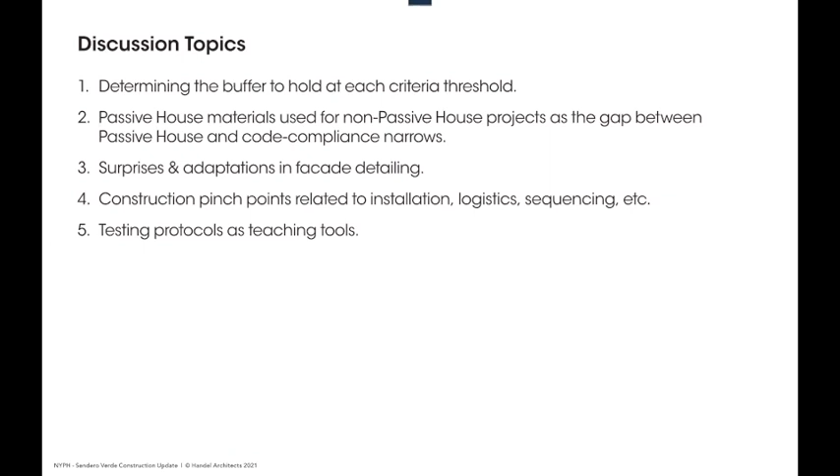We touch on a bunch of these things throughout the presentation today, and then we'll hopefully have a discussion afterwards. Let's go to the next one.

So we presented this project a lot in the past few years, but let's just do a quick refresher. Sendero Verde is located in East Harlem. It's a 100% affordable housing, multi-building project with Jonathan Rose Companies, L&M Development, the Acacia Network, and New York City's Housing Preservation Development Department. We have a great design team. In addition to Handel Architects, we have Steven Winter as our passive house and sustainability consultant. This is an Enterprise Green Communities project. Cosentini is our MEP engineers, DeSimone for structural, and then Vidaris for exterior wall.

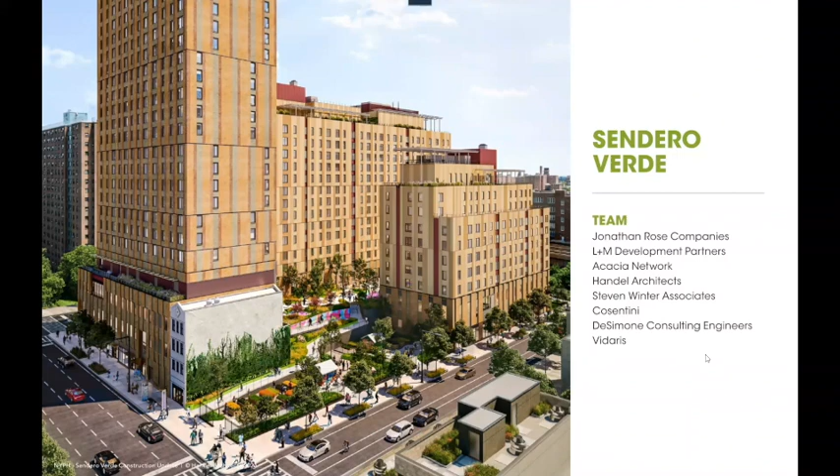The construction manager on the job is also a fantastic team from L&M Builders Group. So Sendero Verde is organized with the tower as building A and the low rise as buildings B North and B South. Now building A is going through bank closing and is scheduled to start construction this fall. Building B is the project that's under construction, and that's going to be our focus today.

Taking just a big picture look at this, Sendero is a 100% affordable housing project. One of the client partners, Jonathan Rose, believes that affordable housing is a connector for the community, and we believe that too. He describes his approach here—you can see the little diagram at the bottom—as a community of opportunity.

And it's about weaving together local culture, arts, healthcare, recreation space, environmental responsibility, and all these other planks, all these other goals. Sustainability is like one weave in this larger picture. And all these components connect neighborhoods together, and they can become a catalyst for social and urban change.

Looking at the diagram there, you can see that the upper floors of Sendero are housing, while the podium has this robust community facility program. In B North, that project has a K-5 charter school by Harlem Children's Zone.

In B South, there's Union Settlement. I don't know how much you guys know about settlement houses - these are uniquely New York institutions, and Union Settlement is one of the largest and oldest New York City settlement houses, and it's been based in East Harlem for over 125 years.

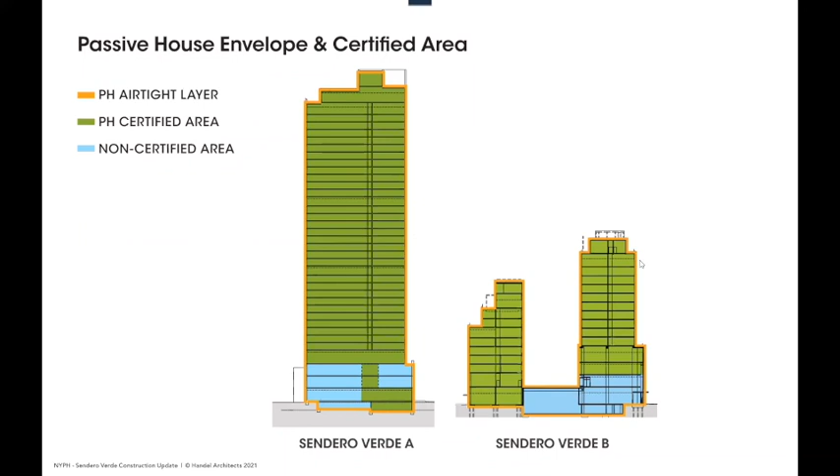Yeah, thanks, Ryan. So, one of the things we're going to get into some technical stuff here. And one of the things I want to mention is that the passive house concept applies really, really well to larger scale, especially multifamily buildings.

Now, think of it as you compare a house to an apartment. A house has essentially 6 sides of building enclosure area surrounding the usable square footage. When you have a multifamily building, if you look at a typical apartment that's not necessarily a corner at the top of the building, it really only has one side of exterior surface area.

So what happens is you get this benefit with large scale buildings where you have a lot of interior air volume and a lot of usable square footage, but relatively speaking, not as much square footage of surface area that you will lose heat to.

So as a result of this, you actually end up needing less insulation levels to meet the passive house criteria. So we wanted to compare, because we're going to show results from B South and B North, and get into the exterior wall assemblies of each and show you the difference between B South and B North.

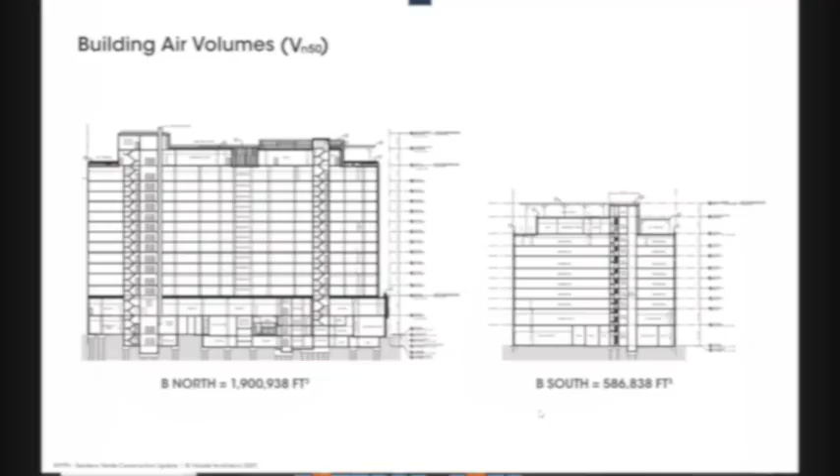One great update we can share is that both buildings are pre-certified, B South and B North, through the Passive House Institute. We're very excited about that, it's a very good milestone. It's something I feel is critical on every project, to ensure you have a grounding going into construction that you cannot deviate from this level of performance because you've been pre-certified. It really gives you something to stand on when working with contractors and the team throughout construction.

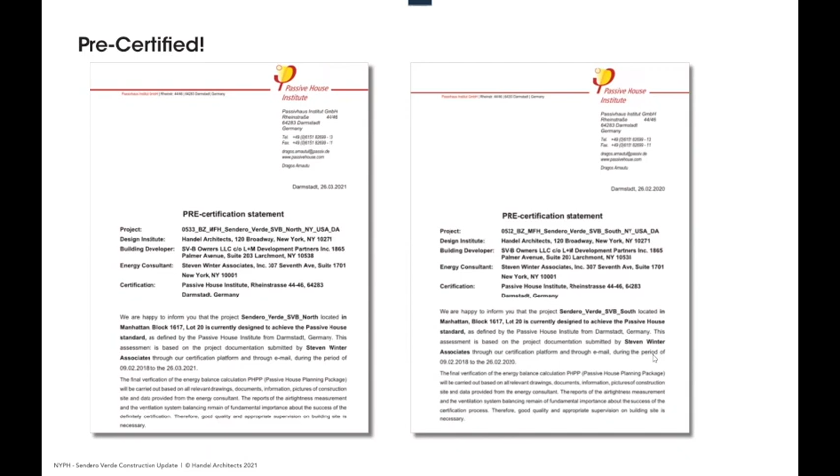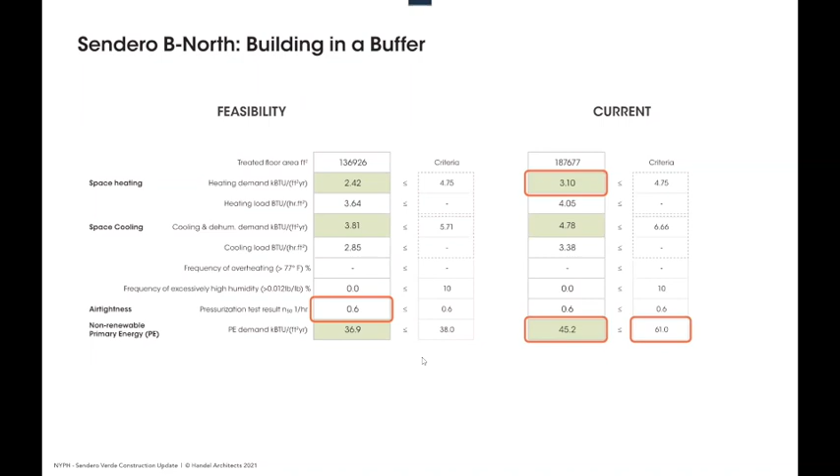As Lewis will get into in a few minutes, we'll be able to see the difference in levels of insulation required for this project. Again, this is all related to the building's air volume. The same thing holds true across the board from the cooling demand perspective with regards to occupancy, our air tightness assumption being as conservative as possible there, and on the primary energy thresholds as well.

All right, thanks Dylan. So I'm going to talk a little bit about the facades of the building here on B North, and also touch on Building A as well, just for reference.

On the left side here, we have the design detail for the typical wall in Building A. Building A is a brick facade all the way up the tower. We designed this one first, so that was kind of driving the initial part of the project. It's a stud backup wall with mineral wool insulation. We have continuous mineral wool insulation in the brick cavity. Then we have our airtight layer, which is our waterproofing behind the brick, and a vapor control layer to keep moisture out of the insulation on the warm side of the air barrier. So that's Building A, where we had a brick facade.

On Building B, where we primarily have an EIFS facade, there's a lot less insulation. Over here we were looking at 9 inches of insulation, 6 inch in the cavity, 3 inch continuous. Here we're looking at 4 to 6 inches of insulation. The 4 inches is on B North and the 6 inches is on B South. There's some minor areas where that deviates, but that's generally the case. That's indicative of the heating demand Dylan was getting into, where we had a lot more comfort on B North than on B South, just because of the volume of the building.

EIFS is a challenging material to work with aesthetically, but it's a great material from a thermal standpoint. There's no thermal bridging. You can install it after the windows, so you can overlap the window frame and get really good install values on your windows. We end up getting an R24 effective here with this wall typically. We have UPVC windows in here.

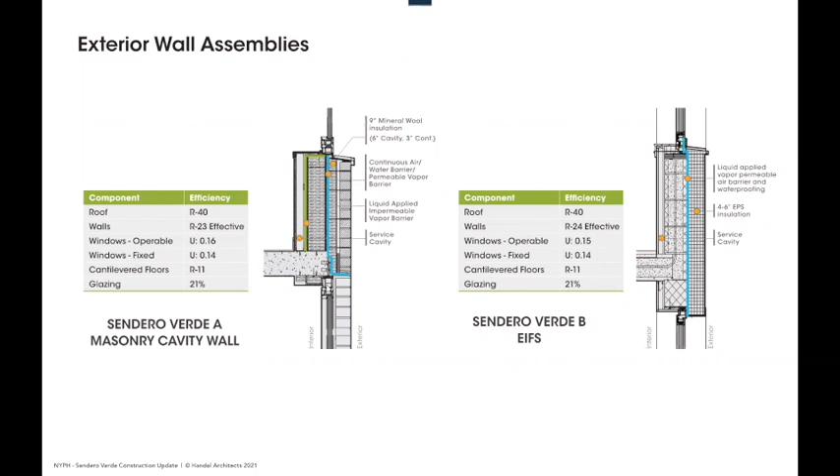We do have some brick facade on Building B North, and that area is a similar detail to what we're seeing here. But for the most part, we're dealing with EIFS in the passive house certified boundary.

This is a good construction photo showing the layers of the EIFS as it's being constructed. You see the DensGlass, and the blue is the air barrier and waterproofing. The white is the EPS insulation. The gray is the mesh and base coat. And then you have your finish coats going on. This is not quite the finish - there's one more coat that'll give it a little bit more vibrancy.

So you can really see that there's no thermal bridging going on here. It's just continuous insulation all the way up. We do have some deflection joints at the slabs and some drainage joints. The deflection joints are just in the finish. The drainage joints do go all the way through. So every 3 floors or so, we have a linear thermal bridge, but otherwise it's a pretty continuous facade.

The insulation was something we really focused on with the project. We wanted to minimize the embodied carbon, which is why we didn't go with XPS - you can see how big an impact XPS has, even though it is a higher R value. We opted for a lower R value in the exterior wall insulation just to get that carbon down. We thought it was a worthwhile trade-off. We end up with maybe an inch more insulation, but a significant improvement in the overall carbon.

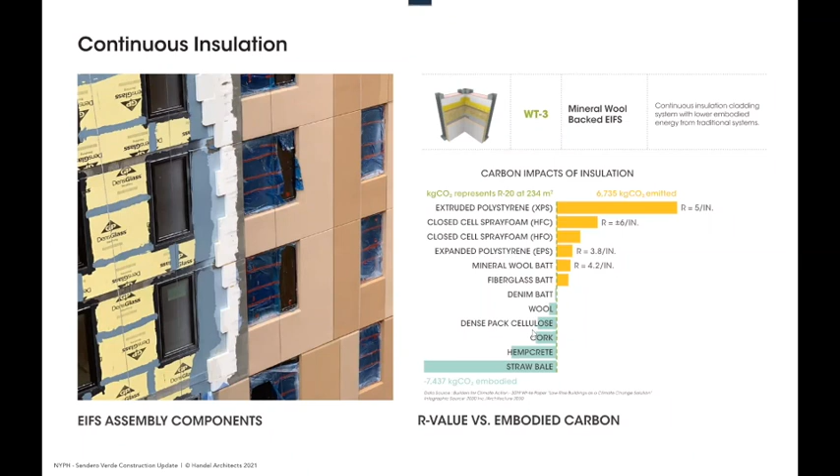We wanted to go with mineral wool, but at the time there was not a mineral wool system on the market. Thankfully there is now, so on our next project we'll be looking to employ that the next time we're using EIFS.

There are some thermal bridges with EIFS at the bottom of the wall. Basically anywhere where it needs to drain, there's a thermal bridge. So at the bottom of the wall, we had a situation where we needed to get flashing up behind the drainage plane. Typically, you would turn that flashing up the wall, and that would be a pretty significant thermal bridge.

What we did was cut the flashing short. So you have the stainless steel, it comes, it stops before it gets to the wall, and then we're lapping over that flashing with a membrane flashing that's coming down off of the air barrier. That limits the thermal impact of that detail.

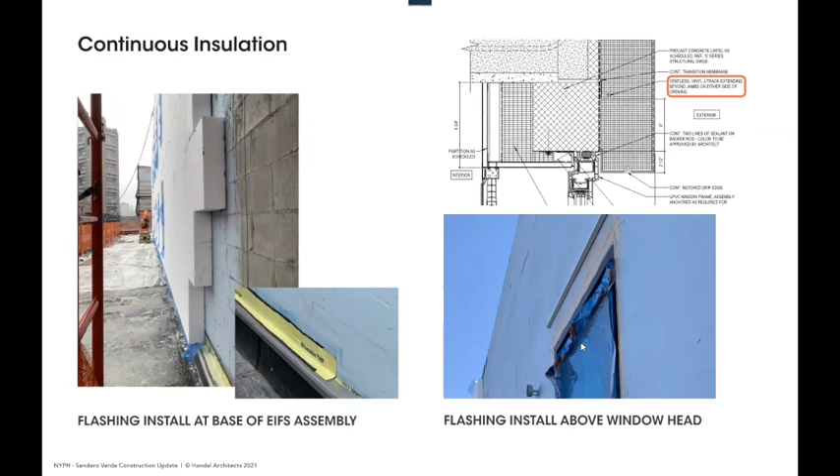Similarly, at the window heads, we wanted to have a piece of flashing here. We revised this detail to get rid of that flashing by having this J-track embedded above the window within the EIFS system. You can't tell in this image, but this track is actually sloped, so any water that comes down the wall hits that track and runs off the side of the window. That allows us to have no flashing above the window head, which is nice aesthetically and also from a thermal standpoint.

Other thermal bridges we're dealing with - we have some significant structural thermal bridges at things like canopies. We have a big steel canopy at all of our entrances, and we have a structural thermal break there, a steel to steel thermal break. We had to spend a lot of time coordinating this, getting it sized and oriented correctly to get through our storefront there.

We have structural thermal breaks below curbs for larger equipment. This is for our generator.

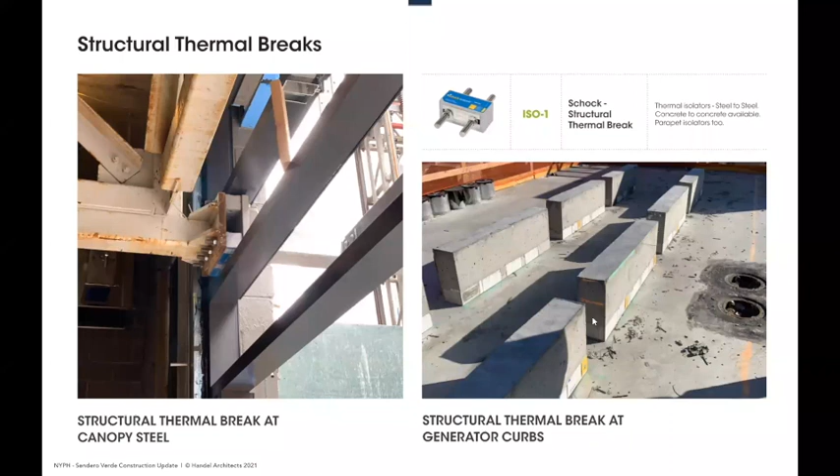At places with a little less engineering required, we're using the general plastics - like dunnage, this is our PV dunnage, our post for our PV system, ladders, OSHA rails. We're using the general plastic stuff. It's a lot easier to work with on site.

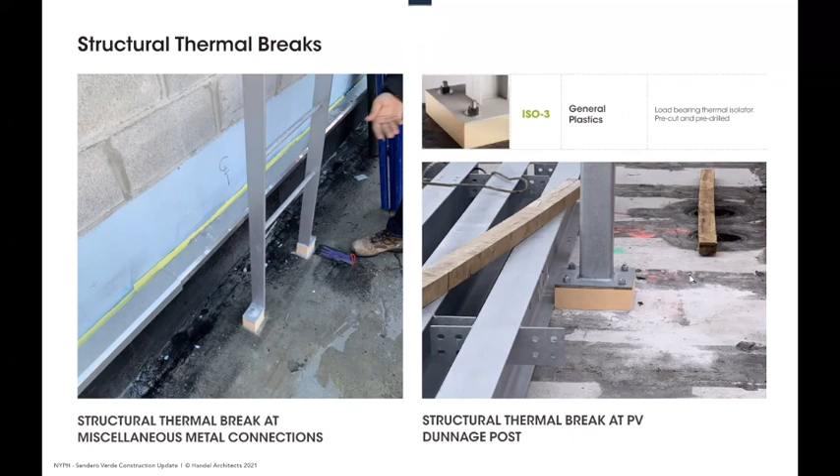Then there's AAC block. We're using this significantly throughout the project, and really this is a product that we're using on non-passive house projects now as well. It's a very versatile product.

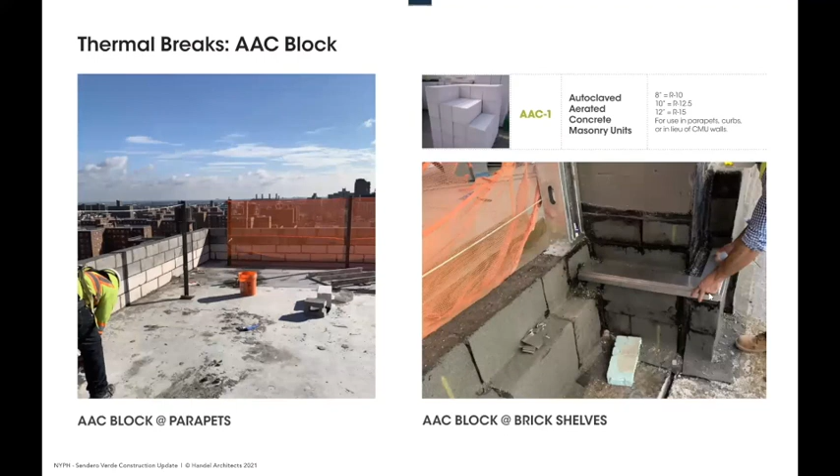This is it at the parapets here - 2 courses of AAC. That's the lighter colored block, and then the CMU above. This is already wrapped in waterproofing, but down here is AAC sitting beneath the brick. So in the locations down at the ground floor and the second floor, where we have brick coming down to our courtyard or our grade, we can set that up on an AAC shelf.

That parapet detail is really one that we're looking to use everywhere, both passive house and non-passive house, just because it really simplifies what is a generally complicated detail. You can see the therm model here with 2 courses of AAC - it really just eliminates any thermal bridging from the parapet into the space.

And this is without wrapping this thing. Typically, we'd be wrapping the parapet in insulation, trying to tie it into the roof insulation. That makes the waterproofing more difficult - it's a kind of expensive detail, a lot of opportunity for error. So this allows us to do this very simply.

The AAC is the same module as CMU, so you're able to get a CMU block above, which we like because we like to mount the railings into the CMU, not into the AAC. It's got a little bit higher structural capacity, so this allows us to get our parapet mounted railings mounted directly to the CMU. Then you have a completely thermally broken railing system, and all very cost effective through that AAC system.

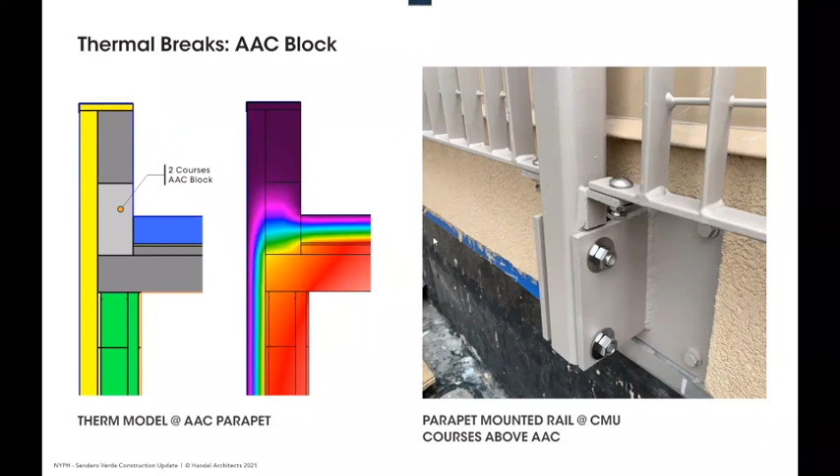Another point of significant thermal bridging was the shelf angles. There is limited brick scope in the passive house envelope, but there is some. This detail was largely developed for building A, but we pulled it onto building B where applicable. We knew that this detail was going to be tricky with our window heads, but we wanted to design a detail that was cost effective and something that the masons could really get in there and do from day one, not reinventing the wheel. So we looked at a series of different systems, but the thing that seemed to work the best was using a thermal shim from Armatherm.

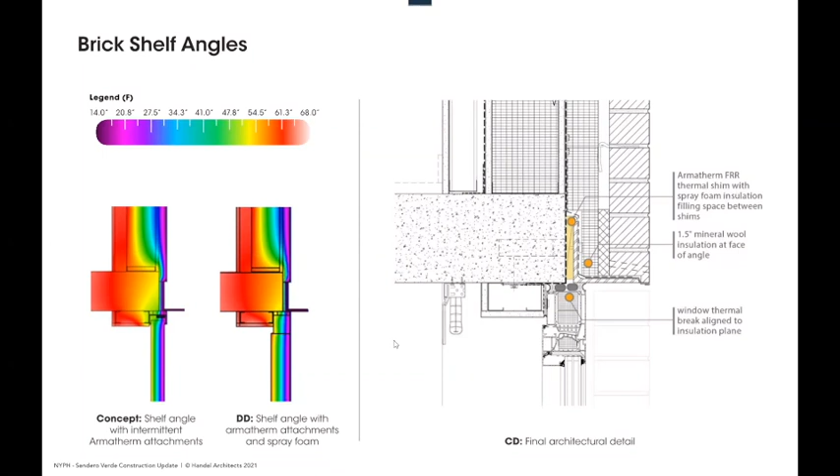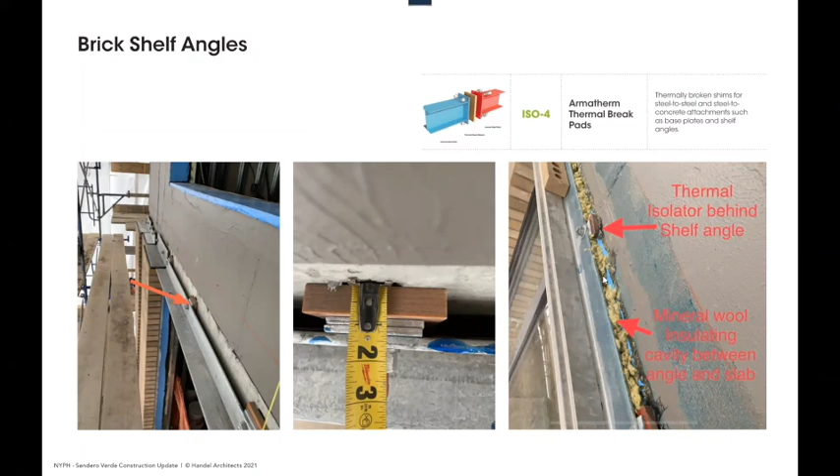Another unique detail we were dealing with here is at the brick. These are all brick details because the EIFS details are really straightforward. With the windows, the EIFS are installed in the wall, the window is aligned to the backup wall, and then the EIFS comes right across the edge of the frame, giving us a good thermal condition. That's possible because the EIFS can be installed after the windows are installed.

With the brick, we wanted to be able to install it first. So we developed this detail to minimize the thermal bridging at the jambs while also allowing the brick to be installed first. The brick is installed against this blocking, so we have a single piece of blocking that acts as a cavity closure. It allows the insulation to get as close to the window frame as possible, and we have a little additional spray foam in there to fill that gap.

The brick is sealed to the window, and the window can be brought into place from the inside and sealed there. This is a photo of the blocking wrapped in the air barrier before the window's installed, and this is from the outside after the window's installed.

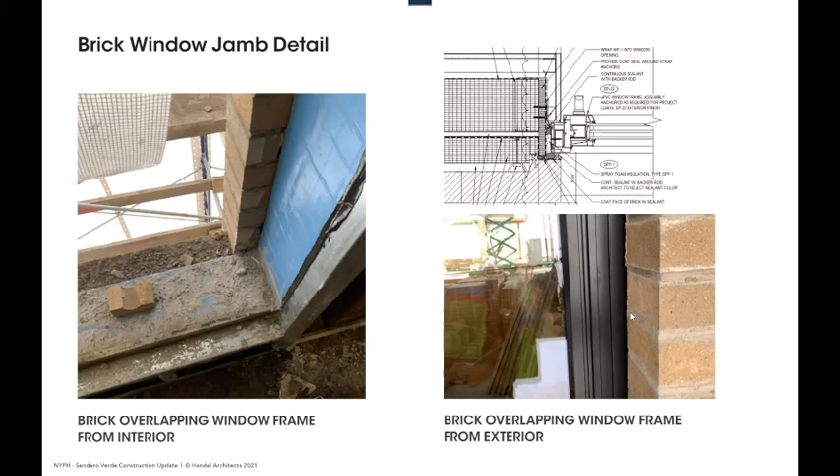One of the things we wanted to highlight here is that this project is so unique in that there are passive house elements and passive house areas of the facade, and then there are sort of non-passive house areas as well. We feel this is a really good potential case study for looking at how we can impact normal construction practices on every project, not just passive house projects.

One thing I'll mention is I'm not speaking in terms of theory here. We actually tested this window, and we determined that on our first pass, they were a bit over our threshold for air tightness. They came up with additional measures to get to a passing threshold from an air tightness perspective, roughly around 0.1 CFM per square foot of facade or window area.

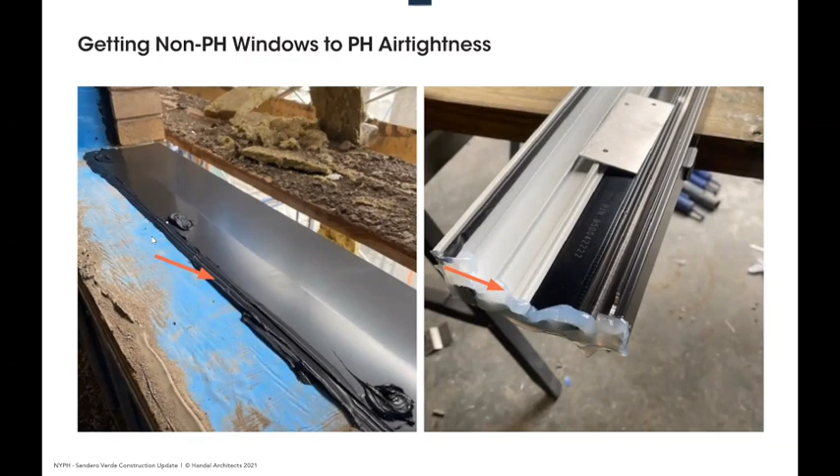You can see setting that sill flashing in sealant, that sill pan in sealant, provides an additional level of air sealing that we found to be critical on this specific system. We've also determined some corner seams as well, and worked with the contractor to see if that would help. I think that provided some benefit, but the interior measures didn't work as much as some of the exterior measures, like the caulking of the receptor and the flashing.

With passive house windows, we generally see that the weep holes are typically sufficient for pressure relief.

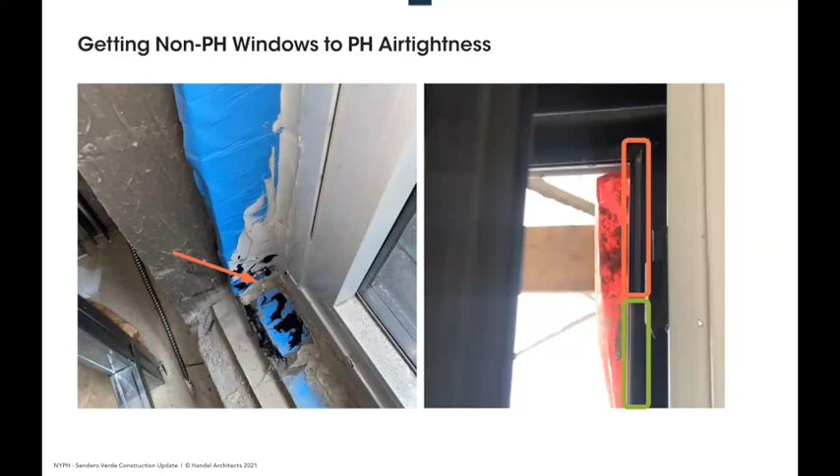When we're talking about air tightness, one valuable test we do is a guarded blower door test, where you pressurize the floor above and the floor below the one you want to test for air leakage. So if we want to look at air leakage on floor 4, we'd pressurize floors 5 and 3 as well as floor 4. This isolates air leakage in theory to the floors above and below, so you're only getting the air leakage through the exterior facade on that test floor, in this case floor 4.

But this also requires us to build some temporary walls, and this is where the test can get a little dicey. For Sendero B South, where we did this test, we had to create temporary walls and temporary seals at the stairwell shaft, the elevator shafts, and also for the temporary hoist.

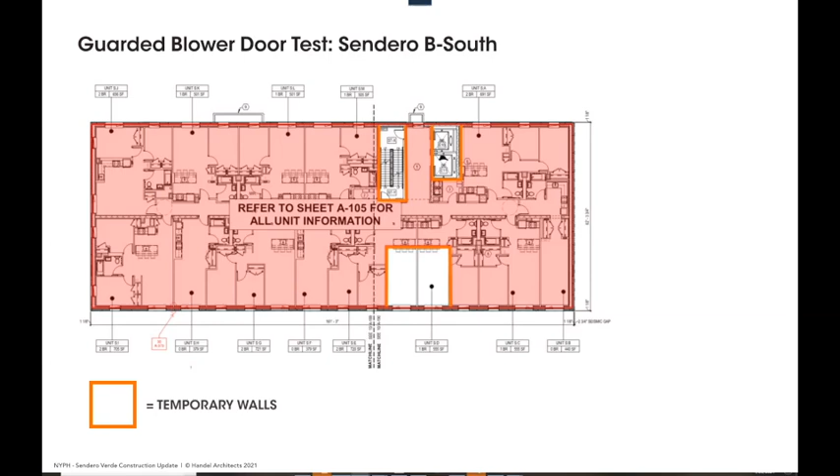But one of the things it's really helpful for is looking at a large array of window performance. We might have 30 to 40 windows on a floor, and when running this test we can go around to every window, feel around, and bring theatrical fog, smoke puffers, and smoke pens.

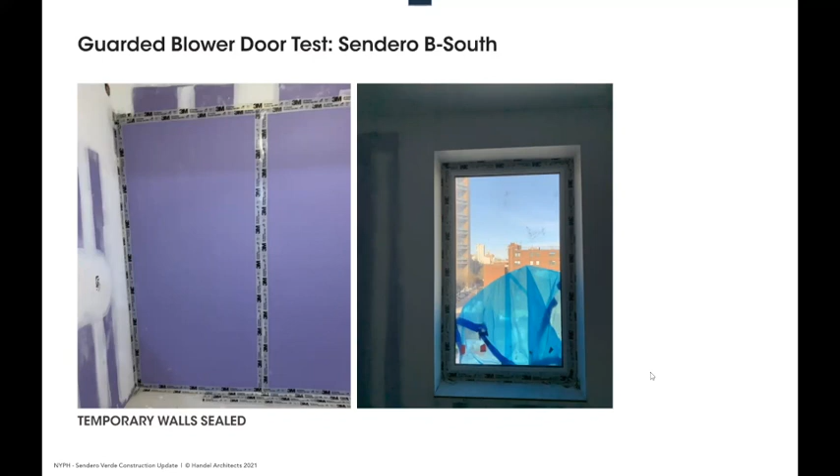In this case, there were a few windows on B South that weren't adjusted properly at the time of the test, and this is one of them. We taped it off first to see what our air leakage number was at a base level, then took the tape off and looked at the CFM of air leakage, which was 1300 in this case, shown here at 50 pascals of pressure.

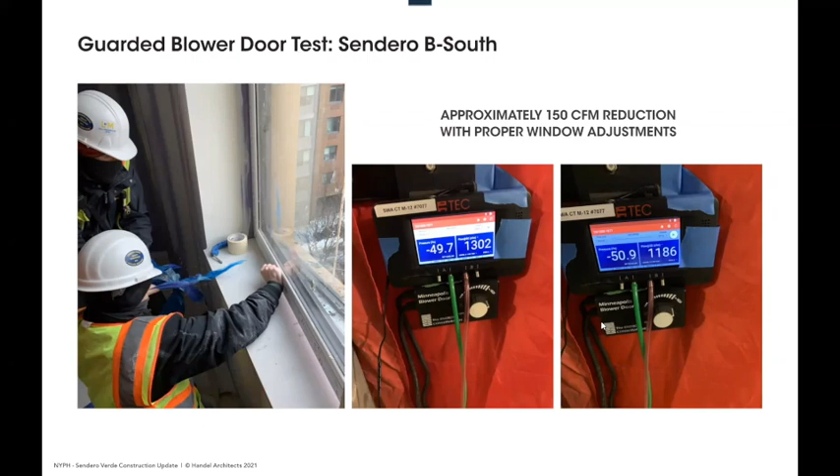We had the window contractor there with us, and we were adjusting the window to set it in the rough opening more properly, so it seals and can actually crank in and really seal shut. After making those adjustments, we were able to cut out 150 CFM, which is a lot for one window. The whole building blower door air leakage number might be on the order of 5,000, 6,000, or 10,000, depending on the size, but cutting out 150 CFM in one window just by adjusting it properly is where we feel there's true value from doing this test.

Now on B North, it was a little bit trickier.

We couldn't do this because of the size of the building. The way the EIFS wall had to be constructed, they had to go by what's commonly referred to as EIFS drops, or drops down the facade, and this had to be done by orientation. The problem is if we waited for the entire facade to be finished in order to do the test, we need the air barrier system installed, but by then all the facade would already be installed. So the guarded test didn't make sense because there was no logical time to actually do it.

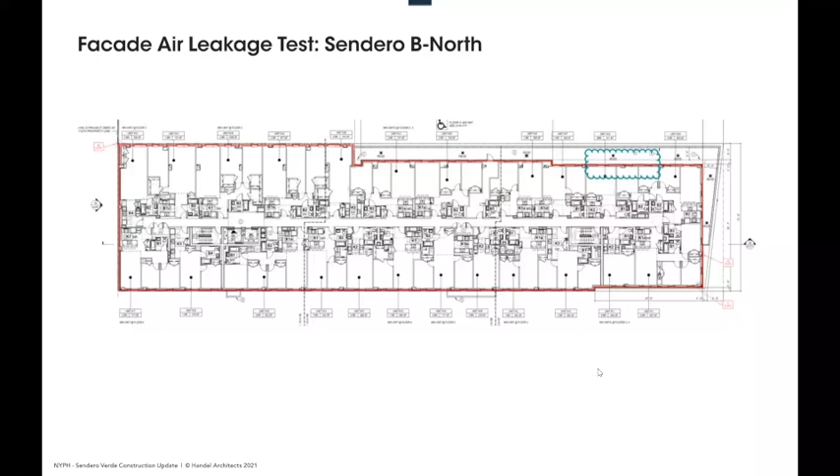So what we did instead on this project is take an isolated portion of the facade, about a 40-foot span on the north terrace on B North, highlighted there in blue, and we created our own chamber. This is something we've done a couple times on a couple projects now, and we've found it to be a very valuable test, accomplishing the same thing as the guarded test, just on a much smaller area.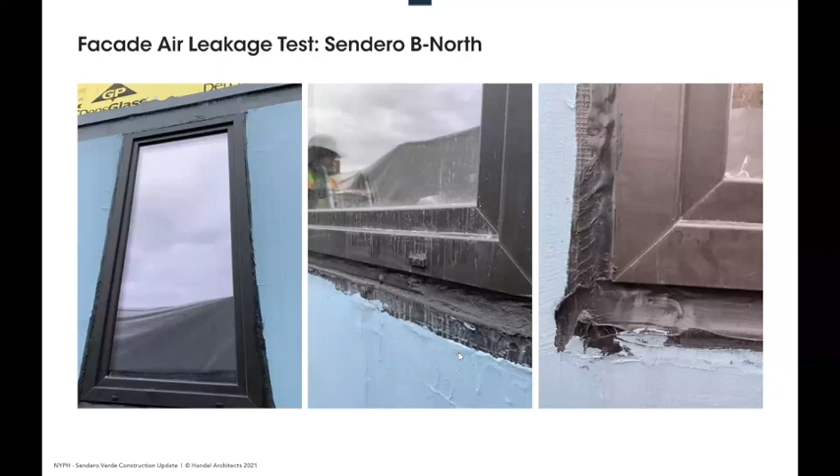So like what Dylan was just talking about, when you end up having such a robust envelope, there are obviously lighter loads on the mechanical system. This allows us to use primarily VRF systems, which pairs nicely with electrification initiatives and reducing our reliance on fossil fuels. At Sendero Tower, we followed a very similar strategy to Cornell Tech - it's a split VRF system with a condenser porch outside the thermal envelope that requires thermal breaks, and then we have condenser loops that feed evaporators in each unit.

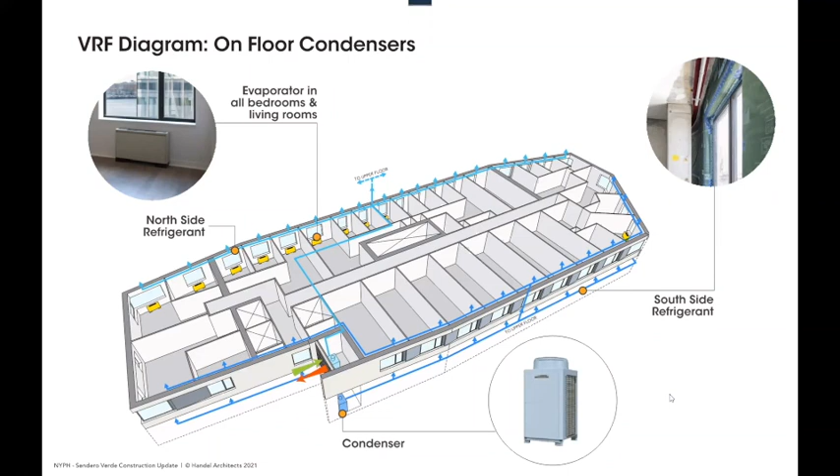We located the condensers on the roof with vertical refrigerant paths. This is kind of a more standard arrangement. It obviously takes up less floor area.

But because we also are using the rooftops for amenity space, predominantly facing south for orientation and sunlight, on the south side we located all the condensers up at the main bulkhead roof so that we could clear the space for programming. And then on the image on the right, that's kind of a diagram of a north side distribution.

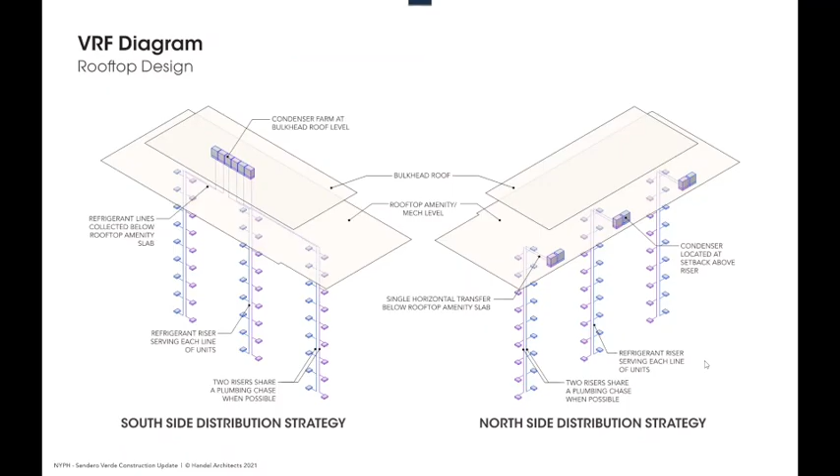We were able to put the condensers lower on the setback roof, which is a little bit more efficient—a shorter distribution strategy. So for this Sendero Verde project as a whole, we set out during the schematic design and planning phase to look at what sort of HVAC systems we actually had.

And specifically the heating and cooling systems that we had available to use for this project, and what our options were. One of the things we looked at was the potential to use a sort of PTAC style unit, or a VTAC, is what it was called.

It's essentially a vertical PTAC. And we tested one of these units, I think it was back in 2017, and it was, I would say, at least 10 times more air leaky than we needed it to be for passive house. So we sort of ruled that one out off the bat.

We understand that it provides an enormous pro in that it is very familiar with trades, and it's something that is certainly not as expensive as some of the other systems out there, but we just didn't have a path for it.

The other option that we looked at the start of the project was using a water source based system, or a hydronic system that used water source heat pumps and a centralized heating plant and a centralized cooling plant. Now, this one is interesting because today we actually have a path in passive house to do that.

And one of the reasons why is we get a little bit of a primary energy allowance that is useful for the pumping energy associated with the system as a result of the multifamily threshold adjustment. So that's actually opened the door up for this type of system.

And we determined that there actually is a path for this system. It's not, in its factory state, to the level of passive house, but as a result of this testing and working with the manufacturers, we came up with specific measures that the manufacturer can take to get to a passive house level.

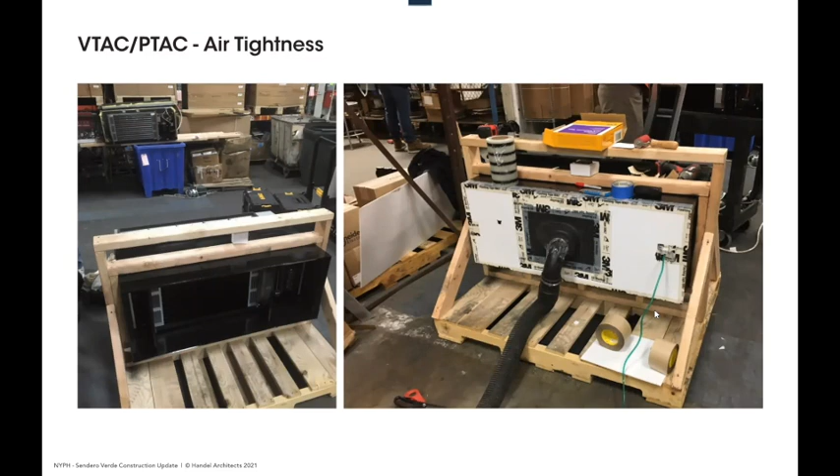Because when we tested it, it wasn't that much over our threshold. It wasn't 10 times leakier—it was maybe 1.5 or 2 times. And we knew that if they took these extra measures, they could get there.

So what these measures are, it's the actual seams at the sheet metal sort of box around it that need to be sealed. In this case, in the test, we actually sealed it with metal tape to simulate that. Weather stripping at the perimeter of the sleeve and make sure that the PTAC is actually sealed tightly when it's installed. So ensuring that it's installed right.

You don't need a knockout for fresh air with these units. We're providing fresh air through our ERV system and the ventilation air, which is a centralized system in this case. So making sure that's not installed in this specific context, if you have ventilation from another system, will help reduce air leakage. P-traps filled with water, refrigerant line and electrical line penetrations coming through the casing is also an important thing to air seal. And then dealing with straps as well is another aspect we determined.

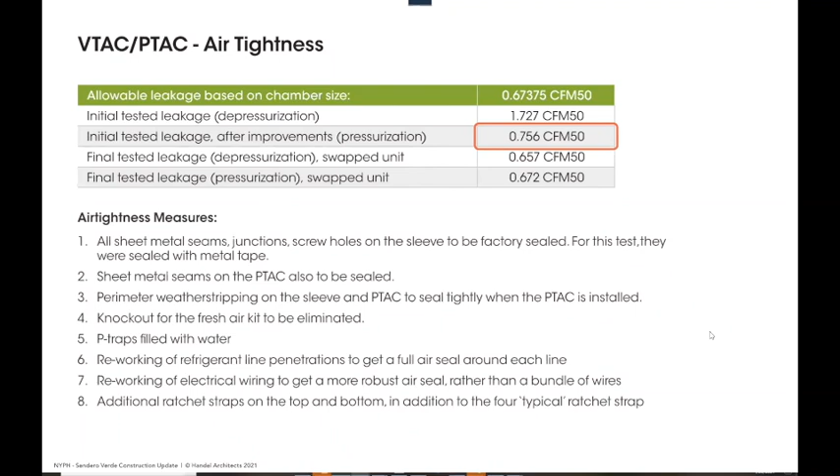One thing that still needs to be dealt with these units, though, is while they are insulated, they are not going to be insulated very well to the level of performance that the exterior wall is at. So if your wall is at an R25, these units may be at best like an R5 when you factor in the thermal bridging of the actual unit. So you really need to, if you're contemplating using these, bake that into your analysis at the start of the project so you can design your insulation levels on the rest of the building to accommodate for that.

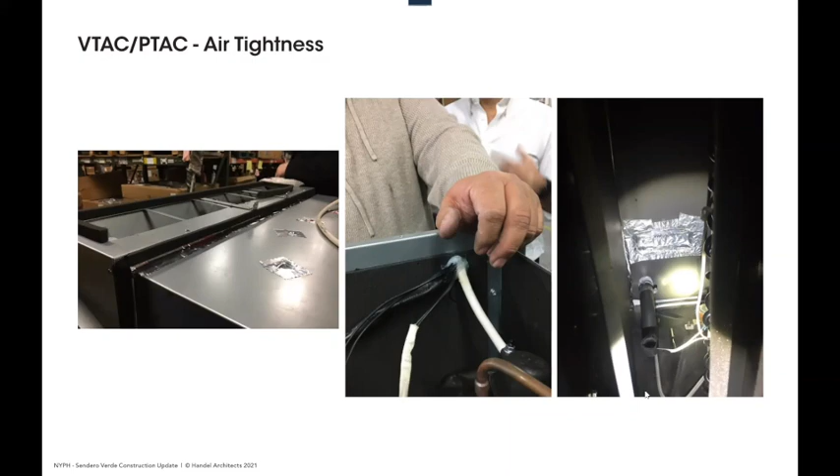These are a CO2 refrigerant-based water heater, which offers a number of benefits. One being the global warming potential of CO2 itself. And the other benefit is that CO2 actually makes for a great refrigerant for hot water when you're looking at the temperatures that we need hot water to be.

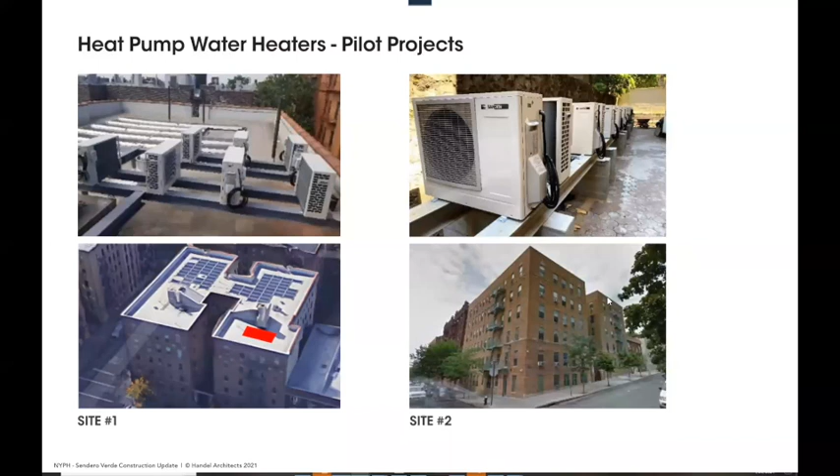So this is an ongoing study. We hope to have more updates in the next few months, but we're actually in the phase now of collecting actual data. These have been in operation for about a month or 2, and we're going through the commissioning phase right now. So we hope to be able to apply it to projects like Sendero Verde in the future as newer projects are developed.

Yeah, so let me jump in here real quick. On the HVAC installation, most of our studio apartments are using wall-mounted VRF consoles. All the other units are using these VRF closets here on the left. It's an upright evap that ducts heating and cooling to each space in the unit. And then these closets have a louvered door, and they're accessed only by building operations.

And then on the right is a cool product that greatly simplifies construction, which the L&M Builders Group loves. These are VRF refrigerant route collection hubs - I actually forget their technical name, but that's what they are. It's this hub where you have these condenser farms up on the roof, and all the refrigerant would otherwise have multiple penetrations in the slab.

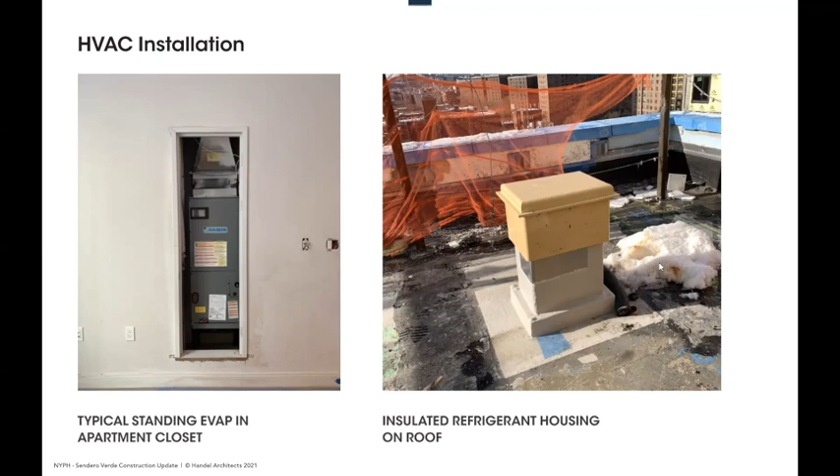Although what's nice about this, it all goes to one location, and then down into the building, it's only one roof penetration rather than multiple. And it's only one thermal bridge location that has to be mitigated rather than 20. And so it makes it faster, more constructible, and it's good on the PHPP.

On the ventilation side, we're progressing our design strategy from Cornell Tech, which utilized fully vertical risers for both supply and exhaust. That strategy took up more floor area in plan, a little bit inefficient. So here on Sendero Verde, it's a little bit more hybrid, and we have one large vertical supply shaft that then horizontally distributes above the corridor to the rooms on the floor. And then exhaust risers are also being shared with multiple apartments. And of course, fresh air is being delivered to every room for the renters.

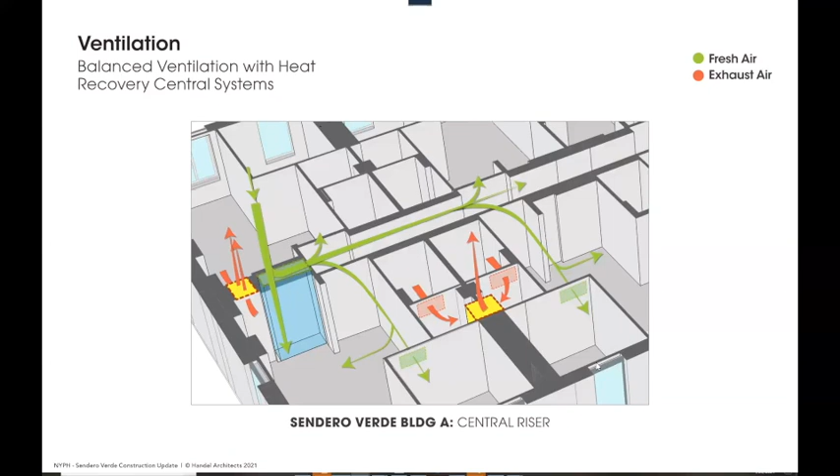Let's go to the next slide. Some ERV performance - this is interesting. On Cornell Tech, there were no Passive House tested ERVs at the scale that we needed.

We were forced to derate the ventilation in the model and counter with a lot more insulation in the wall to compensate for that low efficiency number. And so at Sendero Verde, now we are starting to see larger ERVs that are meeting passive house requirements, and it's resulting in a more robust and tested ERV, and allows us to reduce our insulation requirements elsewhere in the project, saving the owner money.

This is kind of like speaking to the buffer that Dylan was talking about earlier, because of the ERV efficiency getting higher, then we're able to spend the energy budget elsewhere on the job, maybe things which are not as easily solved yet.

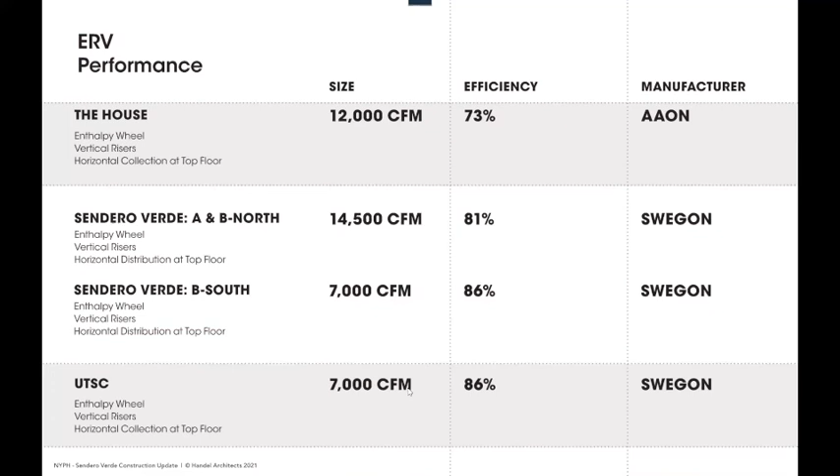Next slide. And then here are a few images. This is B South, but both B North and B South, they're 10 stories. So the bulkhead is visible, particularly from directly adjacent, which is going to be the Sendero A tower. Just wanted to point out that you're using these PV arrays as screens to help shield view of mechanical equipment, while also generating electricity on the project.

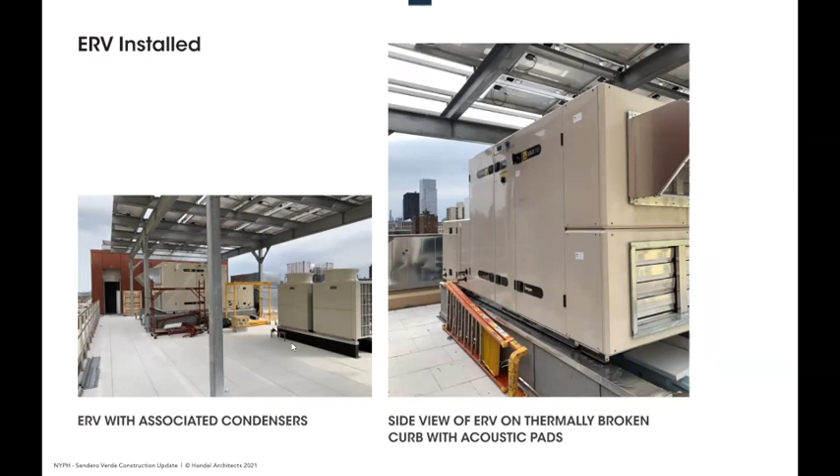There's a question that came in about how the fresh air is balanced in the building, and really duct sealing is a really important part of that. One of the things that we've been working through on this specific project is the AeroSeal process.

The thing to keep in mind is that AeroSeal really isn't a widely adopted practice right now. So we were working with the mechanical contractor on this project, who actually very recently got trained on how to do this work. We were working with them on making sure that they were doing it properly and offering that level of quality control.

There's some specific measures that I want to highlight, because it's really important when we talk about duct leakage, especially in passive house projects, because duct leakage can be so significant it can really end up breaking energy models in a lot of cases. If you have 10% more airflow through your ERV than you budgeted for, because it's all getting leaked out and you need to hit minimum airflows in your apartments, that could jeopardize compliance with things like incentives. So it's a really critical thing, and we want to make sure that teams doing this are doing it correctly and to the specifications.

One of the things that we found is the photo here on the left is when they do the AeroSeal process. Essentially what they're doing is connecting up their fan equipment, shown here on the right, to the duct system. They're pressurizing the ducts to a high pressure and essentially injecting in this aerosolized product that will seal cracks up to half an inch, and it really helps get those sort of nooks and crannies.

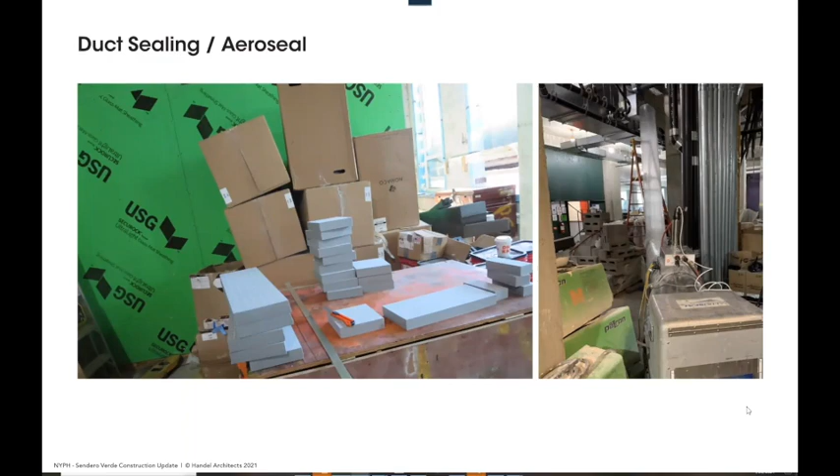We've seen some contractors that want to just do their own methods that aren't sufficient, and as a result of that, you get air leakage through those registers, which causes problems when you're doing the actual AeroSeal process. One of the things that's really critical as quality control reviewers of the AeroSeal process is reviewing the actual reports.

There's many times where you may see something that looks a little fishy. What we're showing here, the red line is essentially the amount of air leakage in the tested AeroSeal duct, and the horizontal axis is the number of minutes the test is being performed. One thing you'll see here is that we start off at around 500 CFM, and it drops down almost in half within the span of a minute. That might be something to double check, to make sure, are we doing the test right? We expect it to go down, but not that quickly. That's one general thing to ask.

The other thing you'll see here is at about minute 20, it's hard to read, but at the middle of the graph it spikes up and down, then actually gets higher, and then continues to go back down.

One of the things we found on this specific project is that there are multiple settings on the box that hooks up to the duct. If you're familiar with blower door testing, there are rings you put on a blower door, and there's 3 rings. If you have ring 2 on and the software is telling you to put on ring 3, the number you're reading on the screen is incorrect. You need to have the right ring on. That's essentially what can happen here, and that's what's causing these confusing aspects of the result.

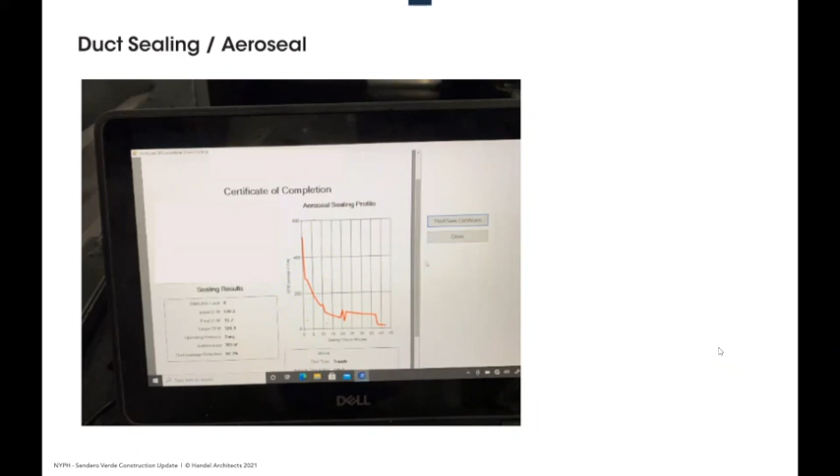Why would it get much leakier and then have to go back down when you've already got it below 100 CFM? So we're reviewing those reports to look for stuff like that.

The other thing we found: there are 2 different specification languages when it comes to AeroSeal. There's fractional leakage, which limits air leakage at 3% maximum. The other option is the SMACNA leakage class, which is a different, more complicated calculation. Generally, project contractors prefer the SMACNA way, but we've found that the SMACNA path can lead to more leakage, usually 2 to 3 times more than the fractional leakage method.

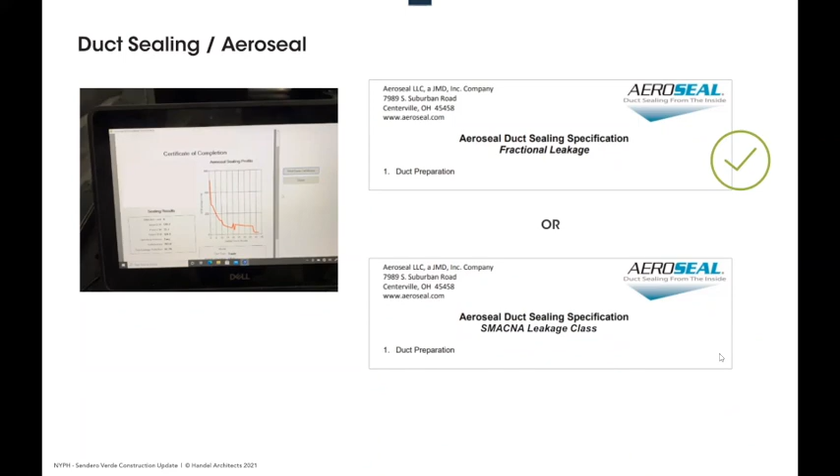So we always recommend the fractional leakage path, and that's something we make sure to bake into the specs at the start of the project. We also, in this case, did our own quality assurance testing of the ducts. We have this formula shown here to convert our low pressure readings to equate to what the high pressure readings of the Aeroseal equipment reads. That was part of this process.

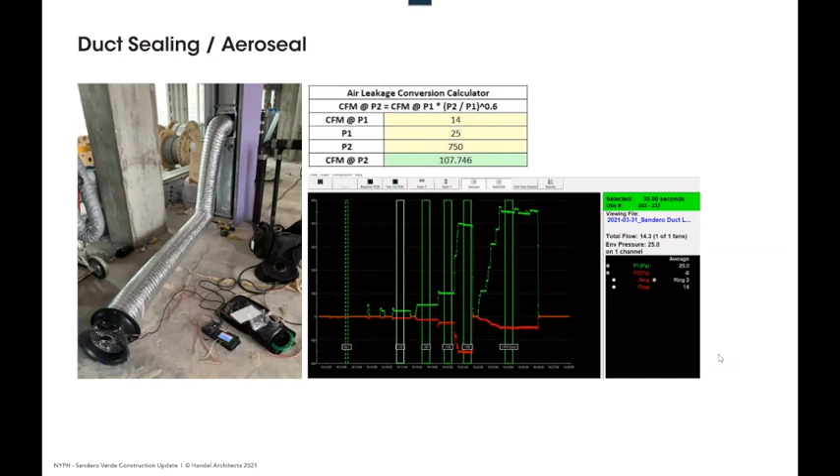We called this presentation Narrowing the Gap. The big reason is that we see Sendero as a transitional project from the building codes we had when we started it to the building codes we'll have when people start moving in, which are getting increasingly closer to passive house.

Both as design teams and as contractors, we're learning a lot and getting ourselves practiced and prepared for the energy codes of the future.

Already those energy codes are starting to change. The 2020 energy code changes included requiring documentation of thermal bridges, both linear and point, similar to passive house. There are requirements for testing now, so air changes are 3 versus 0.6. Blower door testing is starting to get into energy codes, with exceptions for now. Balanced ventilation is the same thing; there are exceptions for ERVs, but they won't be for long.

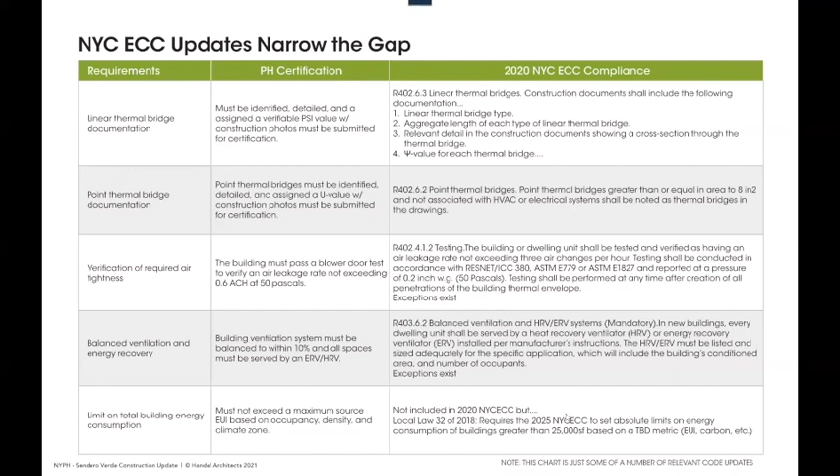And then what's coming: local law 32 was passed in 2018, requiring that the energy code by 2025 set absolute limits on energy consumption of buildings greater than 25,000 square feet. That's EUI, maybe it'll be carbon emissions — we'll see what form it takes — but that's the big performance threshold we strive for in passive house, and that's coming to building codes.

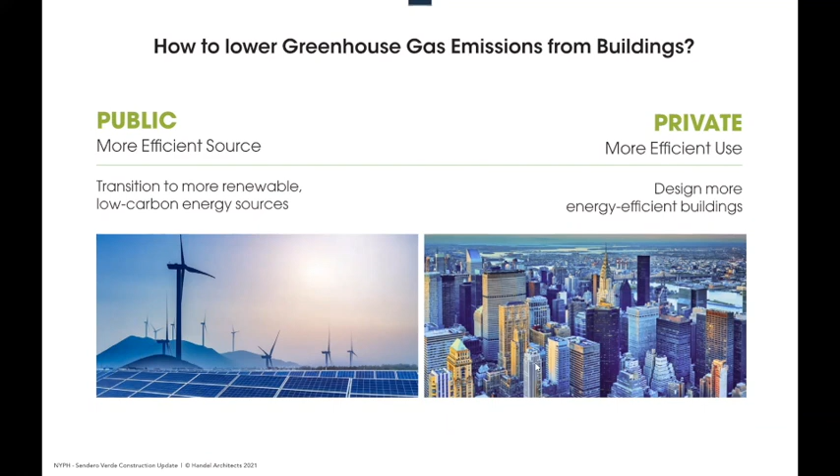To conclude, most of the time us NYPH members are focused on the private side of this equation, but it's important to realize that if architects and developers design energy efficient buildings, that's not enough by itself. To reduce carbon emissions, governments and agencies must also play their significant role. We're reliant on the public side to meet their commitments to transitioning the grid from carbon sources to 100% renewable grids. Both sides need to leap forward together to mitigate climate change. Without a cleaner grid, our efforts towards zero carbon electrification won't have the intended effect. Us NYPH members are ideally suited to advocate for this action.

I know this is a little in the weeds to conclude, but here's our take on New York City's Climate Mobilization Act. Local law 97 is in effect, implementing a carbon tax on building emissions over the next few years, phasing in starting at 2024, then 2030.

And also, New York State government has passed the CLCPA, which mandates the energy grid being 70% renewable by 2030.

So then when you factor in a 70% renewable grid by 2030, voila, the passive house building alone is going to allow us to hit those targets.